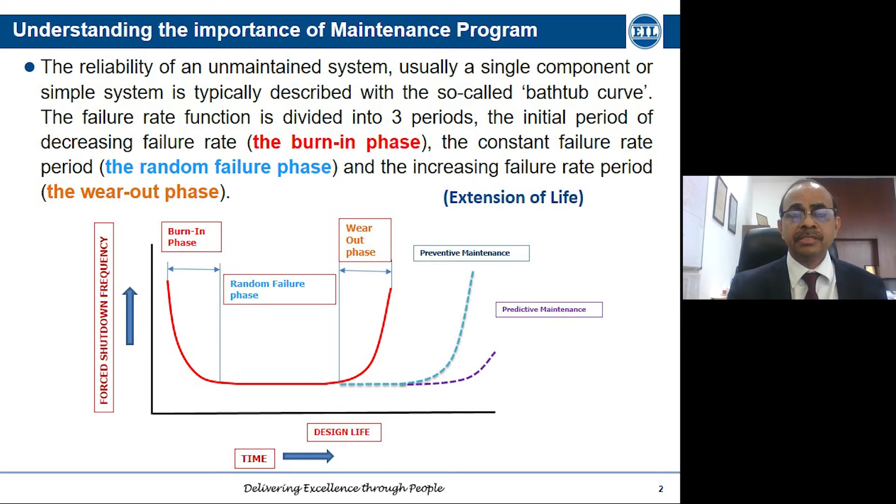And when the equipment is nearing its design life and it is unmaintained, this is the last phase of the equipment operation, again with an increasing failure rate, called the wear out phase. This is typically for an unmaintained equipment. If I do good maintenance, then we can increase the stable life of the equipment by using preventive maintenance.

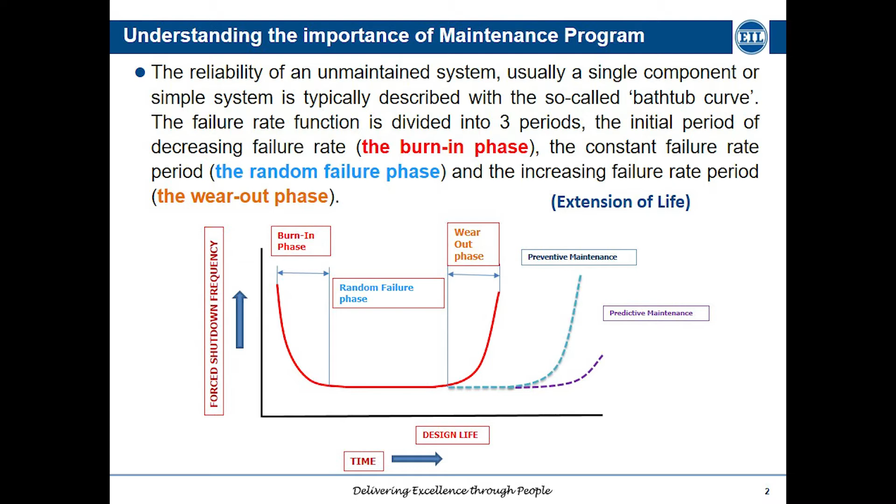I can further increase it. The first one is time-based maintenance. The second is predictive maintenance, where I can increase the life of the equipment further with good maintenance practices. So this shows that we can increase the useful life of the equipment by using the correct maintenance practices.

This is how maintenance is typically categorized. One is reactive maintenance, and the other is proactive maintenance. The first one, reactive maintenance, is when the equipment has failed and it is too late to detect or take an action. The only action is the corrective action they have to take.

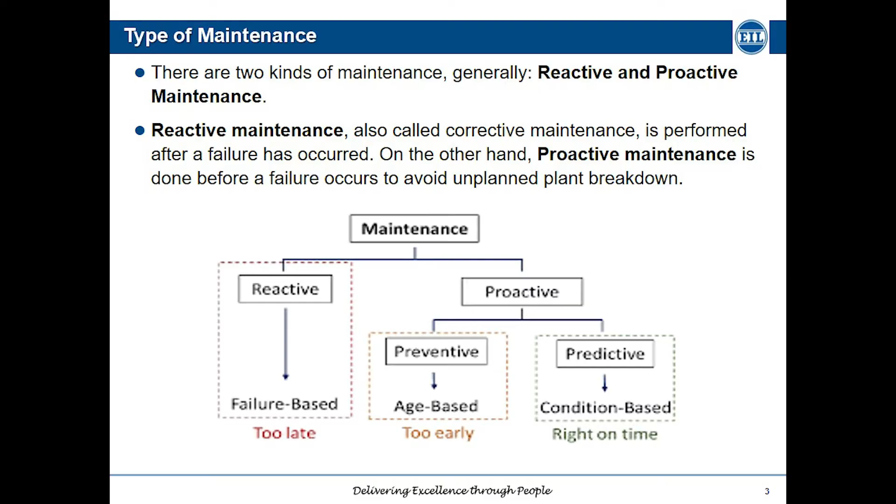The second is proactive maintenance, which includes both preventive maintenance and predictive maintenance. Preventive maintenance means there is already a periodic maintenance program, so before the equipment fails, we have a maintenance program for it, which is periodic in nature. While predictive is based on diagnostics; it is condition based, so when the performance of the equipment deteriorates, the maintenance is carried out before the equipment failure.

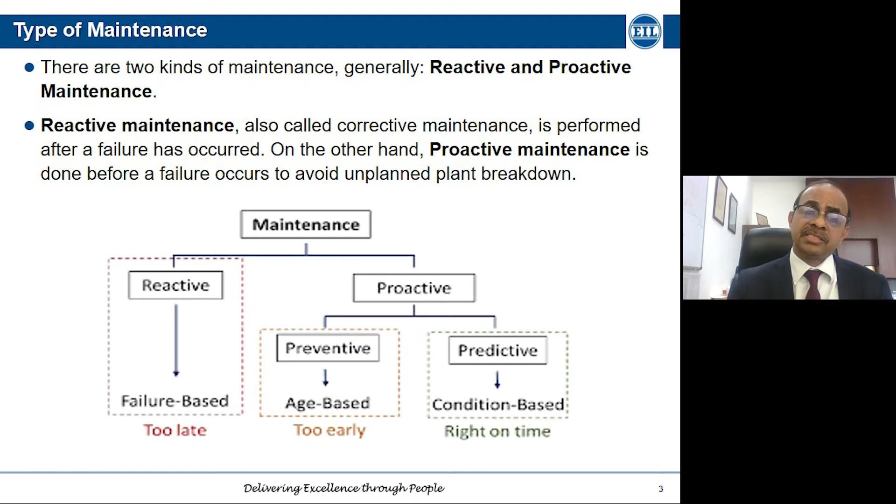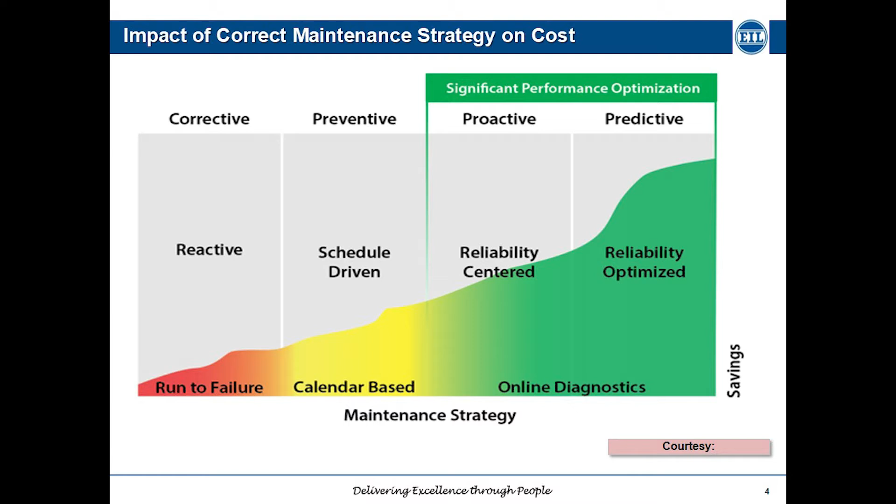This slide shows how the various types of maintenance strategies impact the savings of the businesses. Reactive maintenance gives you very little saving, because only when the equipment fails you take the action, so there is a shutdown period during which you lose production. Next is preventive maintenance, which is calendar-based maintenance. Here I'm spending more on maintenance, so my profits are still not so large.

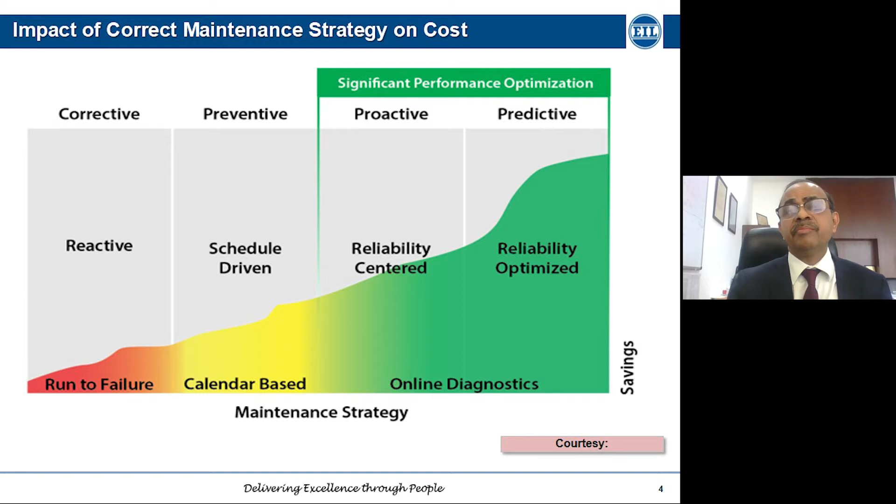And then proactive and predictive maintenance, where there is a substantial increase in the savings, and I'm using online diagnostics to decide when maintenance of the equipment is required, and only then I spend on the maintenance of the equipment.

These are some of the case studies that we have performed recently, because we have a dedicated division for handling asset reliability and health inspections of various equipment.

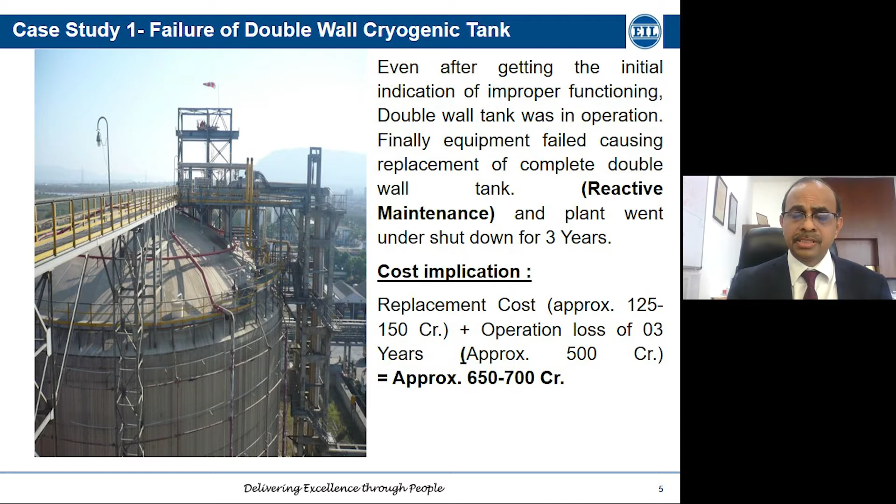This is a case study from one of the owners in the oil and gas sector. These tanks were storing cryogenic liquids, hydrocarbons, and there was a failure noticed by the operators during the operation of the plant. But because there was no maintenance schedule for this, nobody really took action and kept waiting, which resulted in a catastrophic failure of this tank, such that there was no possibility of maintaining that tank, and the tank had to be replaced.

There was a replacement cost of about 150 crores which the owner had to bear. It was a very complicated tank, and it took 3 years to build the tank again. So the total loss we estimate is about 650 to 700 crores that the owner had to accrue because of incorrect maintenance practices.

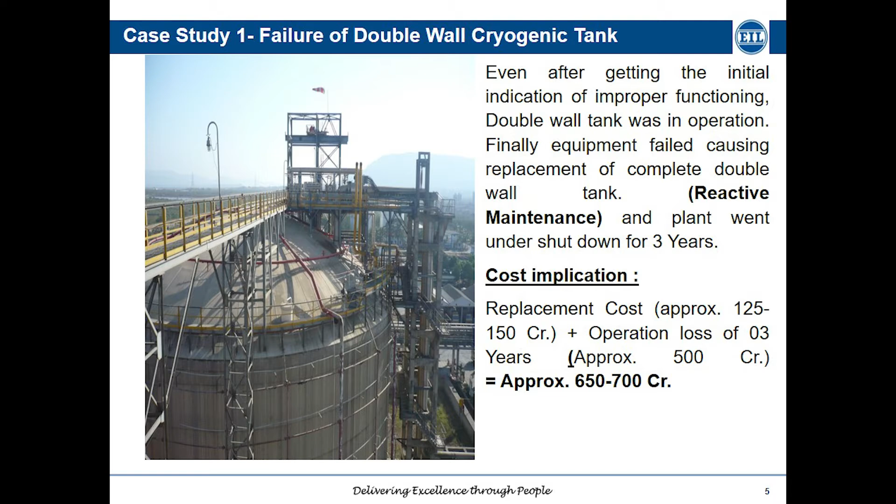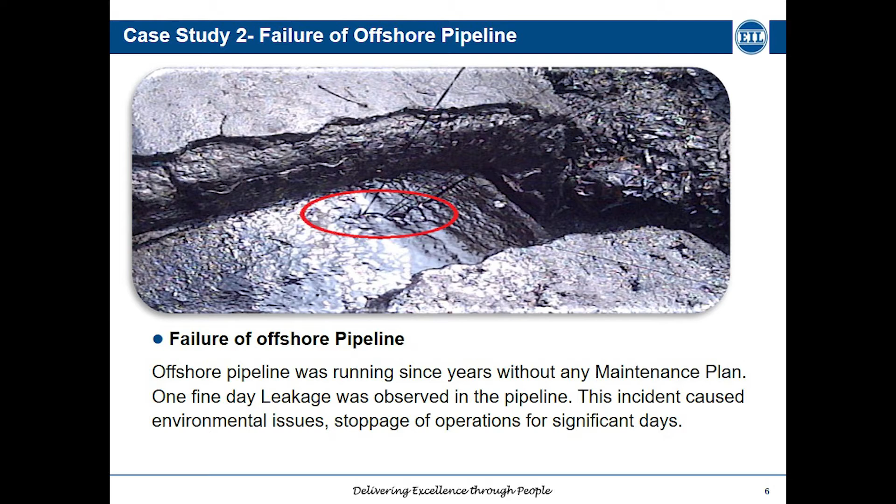This is another case study where a crude pipeline, an offshore pipeline, was running for years without any maintenance plan. One day, a leakage was observed in the pipeline. Since this was handling crude, it went into the sea, causing a lot of environmental issues. Although the stoppage was not very long, only a few days, and the pipeline could be maintained, it had a lot of other impacts on the environment and aquatic systems.

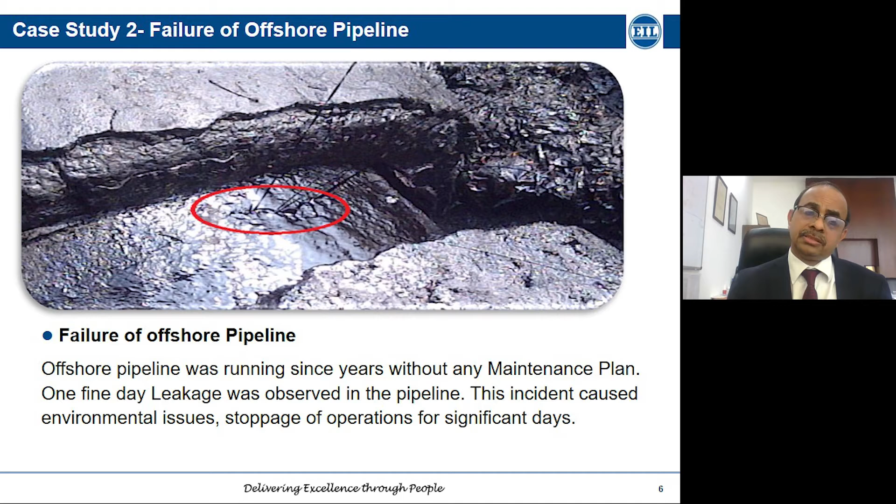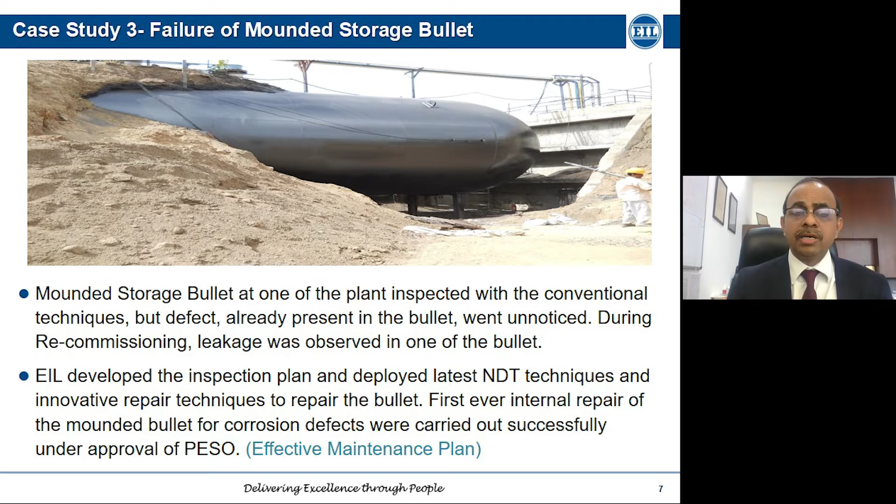This is also one of the recent case studies we have done, involving a mounded bullet at one of our clients. This mounded bullet went through periodical inspection using conventional techniques, and the defect in the bullet could not be traced because of the conventional techniques used. When the bullet was again taken into service, leakage was observed. Since this was very important for the client, who otherwise would have had to shut down the whole plant, they involved EIL, and EIL, using its latest NDT techniques and innovative repair techniques, guided the repair of the bullet.

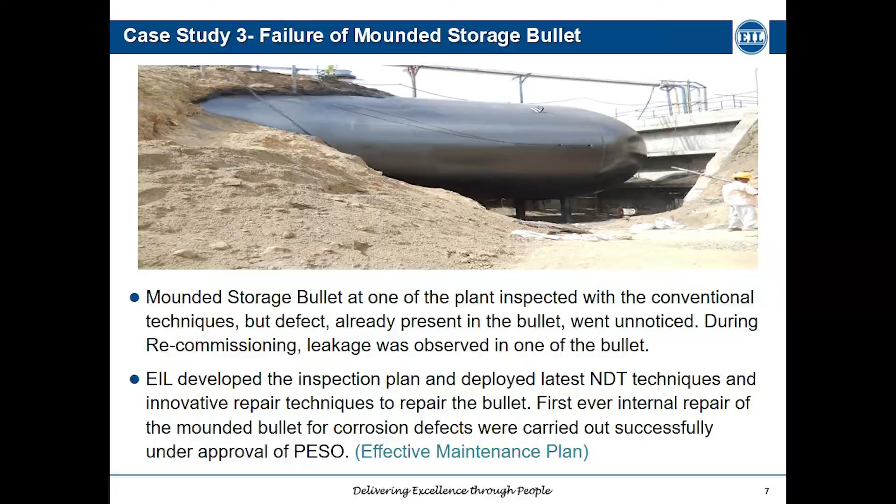This was the first case where an internal repair of a mounded bullet was carried out, and it was successfully done, even with the approval of PESO. This shows the effective maintenance plan that the company should pursue.

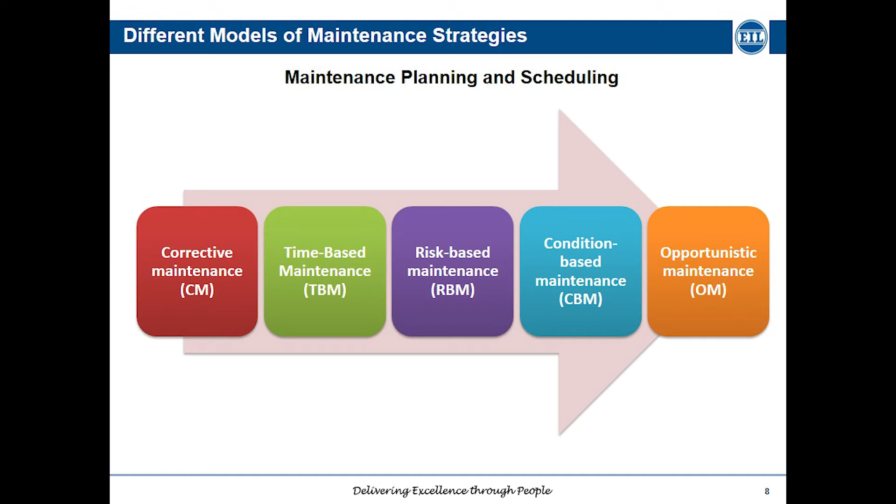This slide shows the various models of strategies that companies can adopt. Normally, what they adopt is a mix of these. Corrective maintenance is typically something which we will try to avoid.

But sometimes if the equipment is not equipped with diagnostics and so on, this is what probably we'll have to follow - corrective maintenance, time-based maintenance. Then we have risk-based maintenance, condition-based maintenance, and opportunistic maintenance.

Opportunistic maintenance comes out of condition-based maintenance - when the diagnostic shows that the equipment is likely to fail, then whenever you get a shutdown of the plant for some other reason, you can utilize that opportunity to maintain this equipment as well. Therefore the total shutdown time required is much less, and it enhances your profitability.

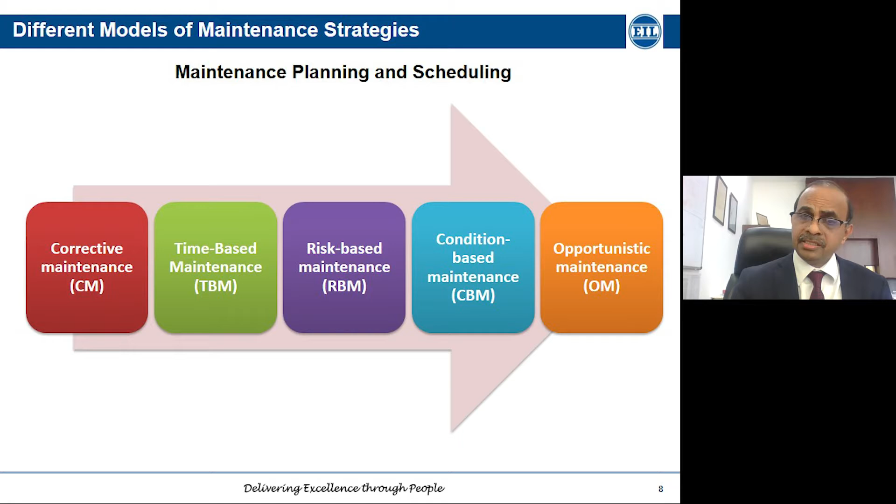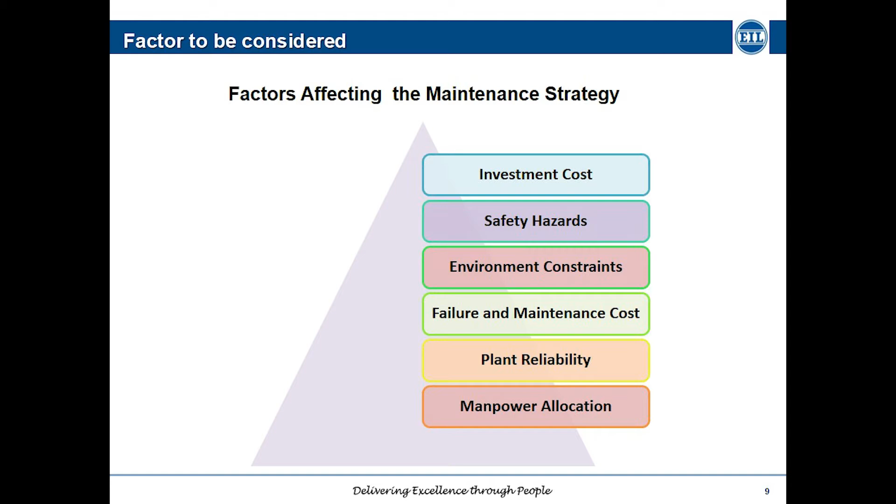So these are the various factors which guide the maintenance strategy that can be adopted by various companies: investment cost, safety hazards, environmental constraints, failure and maintenance costs, plant reliability, and manpower allocation. Depending on these various factors, the company may have to look into charting out their maintenance strategies.

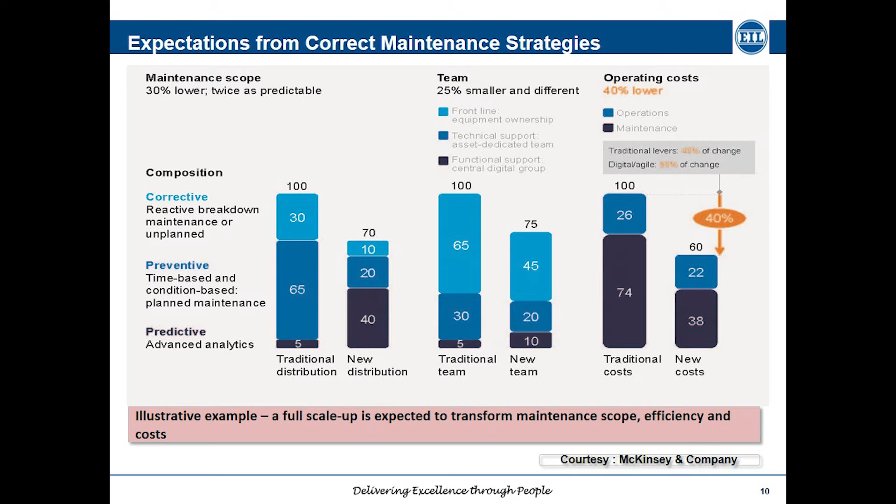The team required for maintenance is also reduced by about 25% when we adopt new practices, because it is helped by digitalization and online diagnostics. And the last point is the cost saving - in terms of operating cost and maintenance cost, the overall cost saving is expected to be 40%.

EIL has been serving the oil and gas industry for the last 50 years. Being a world-class consultancy service in the oil and gas sector, EIL is involved in almost all the upstream as well as downstream segments of the oil and gas sectors. EIL has executed many prestigious and critical projects and supported nation building.

Given the impetus on increasing requirements of asset management, EIL has a dedicated division to provide these services to the industry for asset management to our esteemed clients. Being a design and engineering consultancy, EIL possesses all the know-how of the processes, equipment and maintenance requirements of the oil and gas sector, and provides dedicated services in this field.

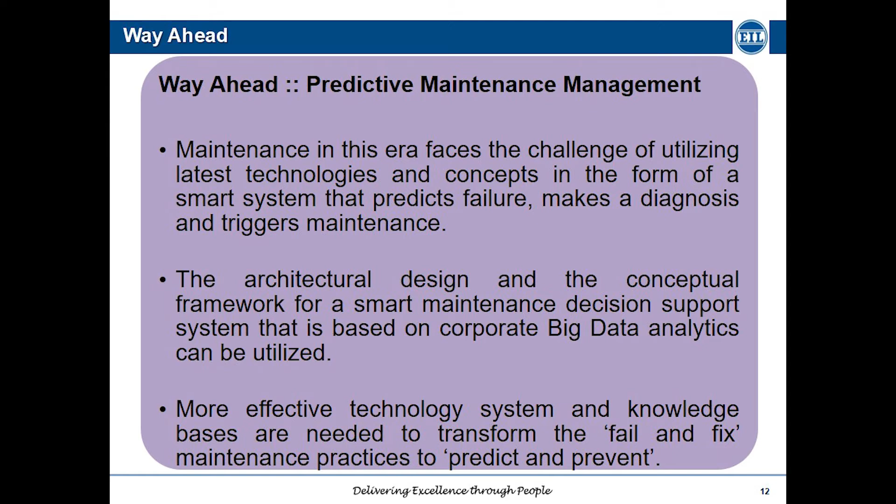So finally, this is the way ahead for the industry: maintenance in this era faces the challenges of utilizing the latest technologies and concepts in the form of smart systems that predict failures, make a diagnosis, and trigger maintenance. The architectural design and conceptual framework for a smart maintenance decision support system based on big data analytics can be utilized for asset management. More effective technology systems and knowledge base are needed to transform the fail-and-fix strategy currently prevailing in the industry to a predict-and-prevent strategy, to make our business operations more profitable and more sustainable.

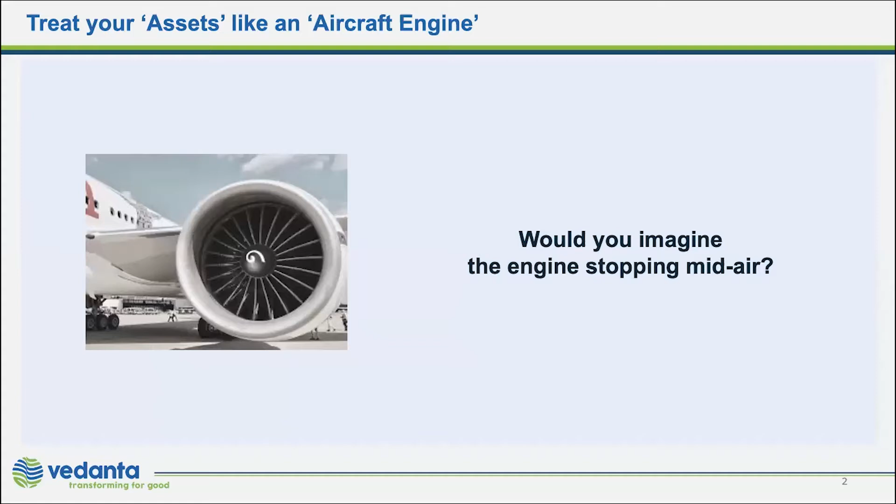So tell me, will any one of us like to sit in an aircraft and suddenly it stops midway? None of us will like to do that. And the reason is because we don't want to die. So if we treat all our assets, regardless of whatever assets we are in—power plant, manufacturing of aluminum, zinc, or anything else—if we treat them like an aircraft engine, it will not stop midway.

Now let me explain the analogy of this aircraft engine maintenance secret. The way they do it, they follow a very stringent process. Before even the aircraft comes, they are aware of what needs to be done. When the aircraft is on the ground for maintenance, there are multiple people and multiple staff working on it, and they track each and every one of them. And post facto, they do analysis. It's a continuous process, and it keeps getting improved. So if we start treating our assets the same way we treat an aircraft engine, they will behave the same way.

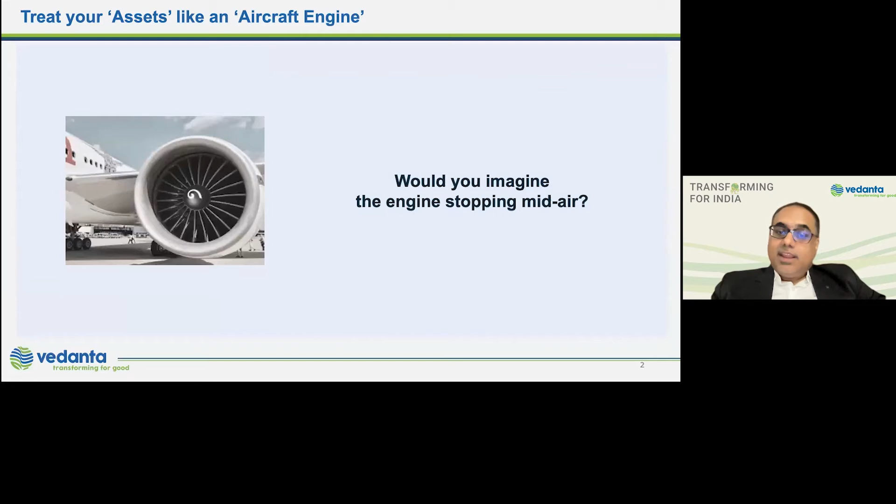There are four different criteria for success for a great turnaround. One is it should be a zero-fatality thing—it should be completely safe. Whatever we do, if we are able to understand the entire process and figure out any issues which can be created, and handle it much ahead, making sure the right PPEs are there, right trained people are there—this is one of the most important success criteria for a great turnaround.

Then is schedule overrun. Any delay is a cost to the company. When I say cost to the company—let's assume a capital overhauling is planned for 45 days, and it took another 5 days because of the process. You lost opportunity for production for 5 days, so it's going to impact the company's overall revenue.

Then is cost overrun. Sometimes either you ask for more parts which are not needed and which will just be sitting in inventory, or you don't plan it right and you don't have the right parts, so you buy more expensive ones during the turnaround. This can be a problem.

Finally, one of the most important aspects is the great quality of the work—that we know who is going to do what, how exactly it is done, and post facto, understanding the entire factor, making sure the assets will run the way they should. Success boils down to these important factors: how is the planning done, how is the execution done, and post-execution, how is the analysis done on the data.

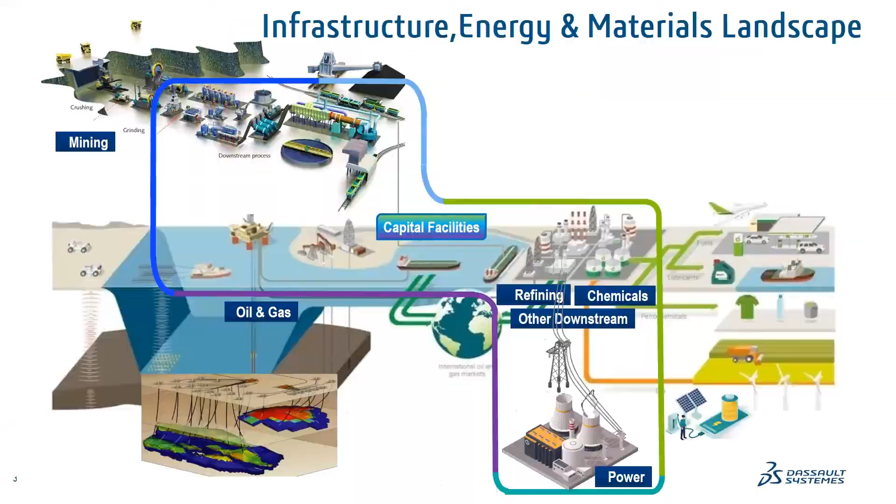With these 11 industries, infrastructure, energy, and materials is one area where we provide solutions to our customers. This energy industry spans mining, oil and gas, refinery, chemicals, process industries, and power as well.

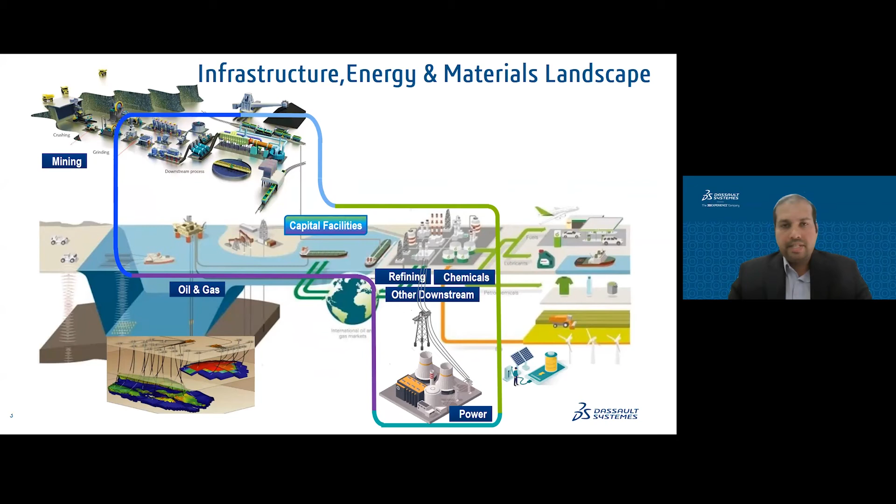We have solutions for each different stage, from project capital facility standpoints to operations and vertical solutions as well. So today we are going to see one of those solutions we offer.

Coming from the same industry, some of the key challenges of turnaround management are obviously extensive coordination between multiple stakeholders, and contractor productivity is low because of various reasons like skill shortages and so forth.

We have unaccounted maintenance requirements, where you come on a particular day and see that this has not been accounted for, and obviously safety and compliance reasons. That translates to loss of production.

And that is what we want to address here: how can we minimize the loss of production?

Now, very quickly, we know the turnaround cycle is a 4 to 5 year operation cycle, and then 1 to 2 months of implementation, maintenance, or shutdown, what we call the outages and maintenance cycle.

What we would like to help the industry with is extending that cycle from 4 years to 4.5 or 5 years.

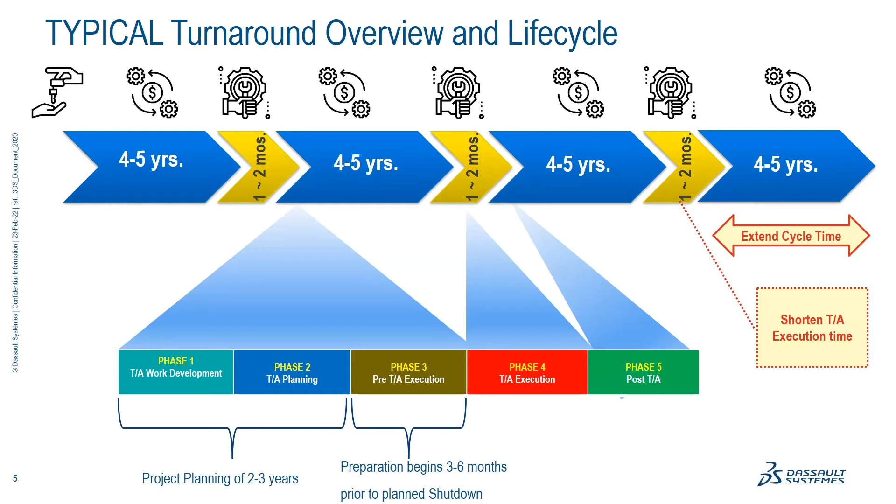And also to shorten the duration, making sure your turnaround is as planned, maybe 4 weeks, 6 weeks, whatever it is. We don't want it extended further. We term this STO: shutdown, turnaround, and outages excellence.

The key KPIs for this business are obviously safety, and you look at quality. When I say safety, you need zero injuries and so forth.

Quality means you have so much information, so many systems - ERP systems, cost management systems, contracting systems, and so forth - and we want quality documentation as well as quality work on site.

The schedule should be on track, on time. That's the key to make sure we start and finish on time.

Cost is obviously one of the major factors. We want to make it on budget.

And as the previous speaker mentioned, knowledge - how do we capture our knowledge for the next generation, or for the young engineers and so forth. We call this STO excellence, and we can achieve that using a 3D Experience Platform, what Dassault Systèmes offers.

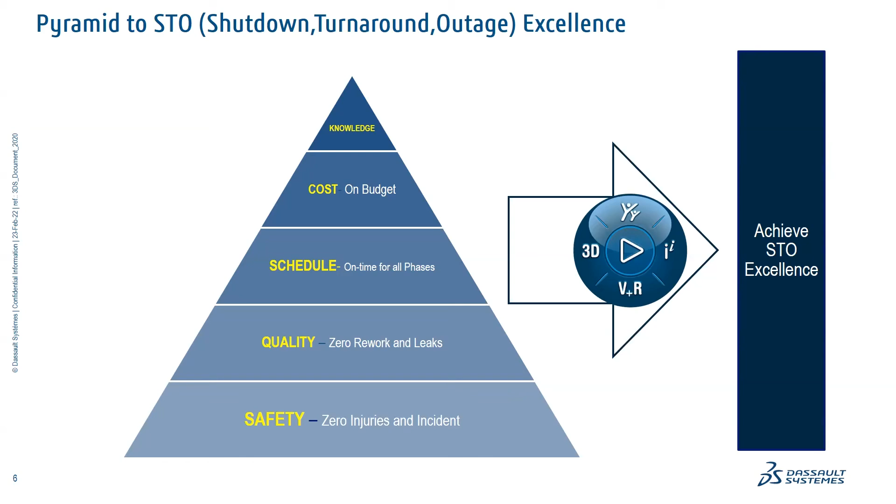Now, what is the 3D Experience Platform? This is a massive platform that helps you with many different solutions, tools, and collaboration tools and so forth.

We basically started with product lifecycle management, so you can manage the plant lifecycle of the assets from inception to decommissioning. We can manage the full lifecycle of your assets, all the different types of data.

In this particular world, how do you try to understand and derive what information you need? How can you move your facility from a reactive approach to a predictive and proactive approach by analyzing all your data?

And obviously with virtual training, realistic simulation, and virtual maintenance, your employees can actually learn about unknown conditions. How can you teach them, train them, or help them work in hazardous conditions? With all the different applications today, we can interface.

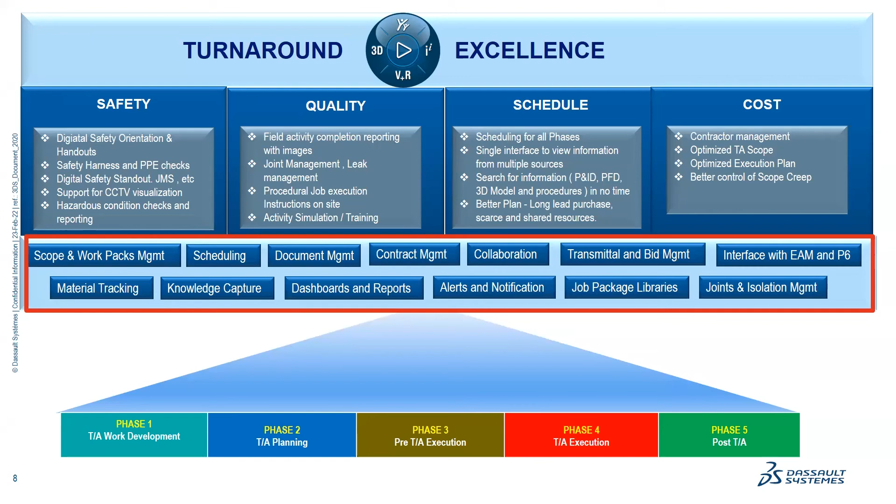You could manage your contractors and all the dealings with your contracts, collaboration within your very internal collaboration, as well as your collaboration with various different stakeholders. How do you basically transmit information between contractors, subcontractors, and so forth? Transmittal and bid management is the answer for that. We could interface with your existing EAM solutions or even project management solutions.

You could do material tracking with your material tracking solutions, knowledge capture, which is basically trying to capture all the various information and so forth for the next turnaround and improve on the next turnaround. Dashboarding and reporting capabilities, alerts and notification, obviously helping people to act on time so that all the tasks are not overlooked.

And obviously we have a list of all the libraries. That means, for example, job package library is a list of all the activities that need to be conducted on a specific piece of equipment. Let's say columns, you already have predefined activities that need to be managed in a particular column, and that can also be customized and added to your needs. And obviously joints and isolation management, which I'll be showing as a sample demo in a few minutes.

Now, just to give you a high level overview, right? All of these different components of the solutions come together to actually help you and give you a full-fledged solution to manage your shutdown or outages and help your crew members to act in a proper manner, in a timely manner, and so forth. Let's move on straight away into some examples rather than showcasing many of the slides here.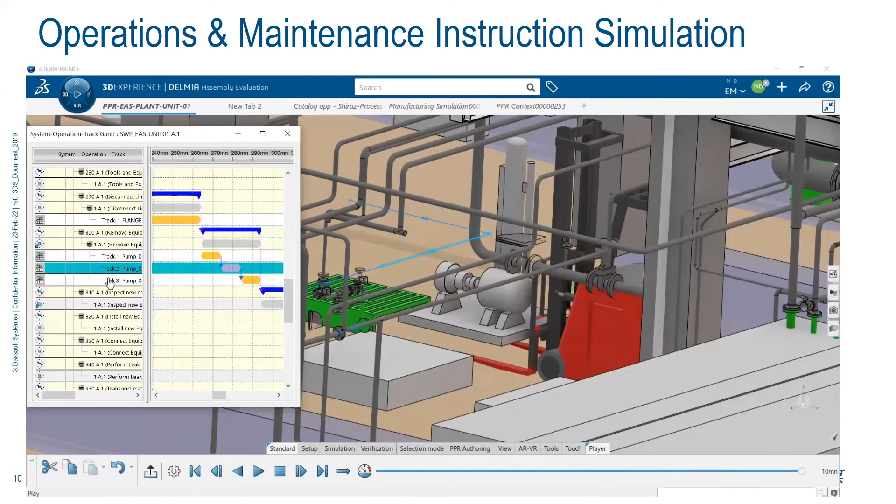Now, I want to show you one of the examples. On the left-hand side, what you're seeing is a plan, and on the right-hand side, you're seeing a 3D model. When you select any of those assets, it can basically simulate and show you exactly how things need to be done on site. This is a good thing for your training. And also, it is good for your planning.

For instance, if you wanted to bring a huge 500-ton crane into a limited confined space, how do you plan? You can use your simulation and planning tools to actually simulate and train well ahead of doing it on site. So that's one of the examples.

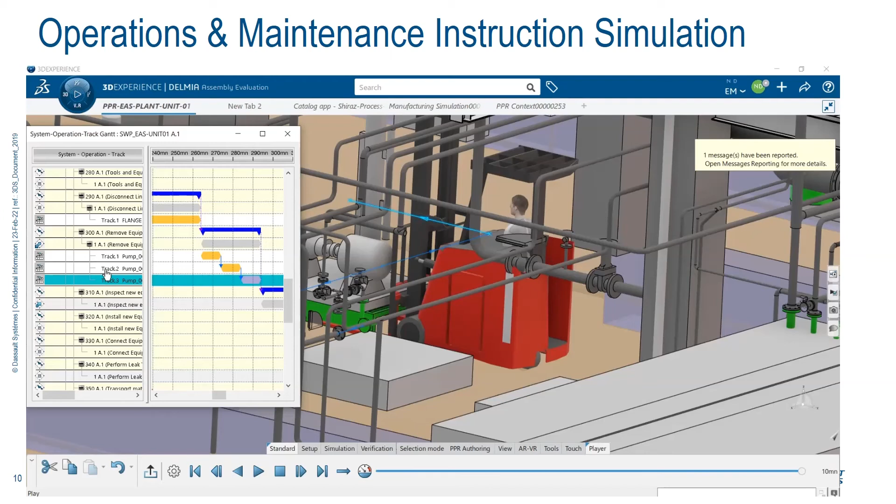And the second example I wanted to also touch base on is a real scenario on the site. Most of you may know we have isolation barriers. Basically, whenever you want to clean up a particular column or vessel, or do any of those maintenance activities, you first need to isolate all of those connecting pipes and the inlets and the outlets so that everything is clear from hazardous materials. And then you basically do the maintenance activities such as flushing and so forth.

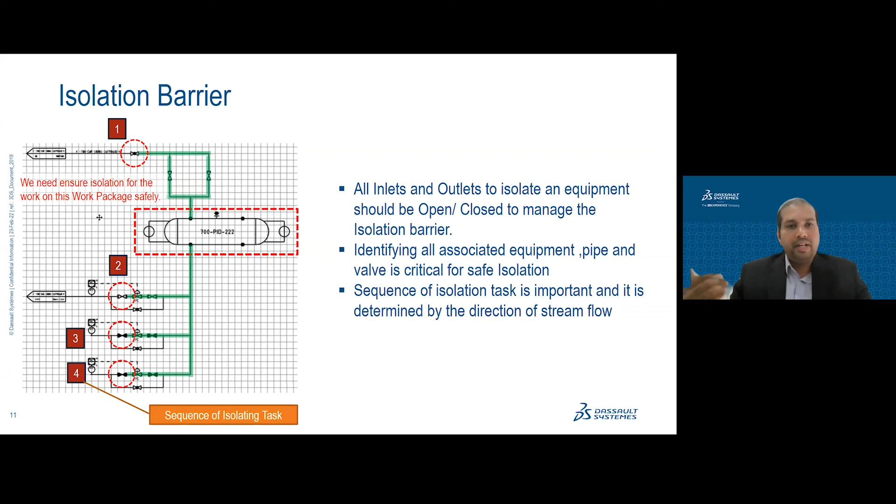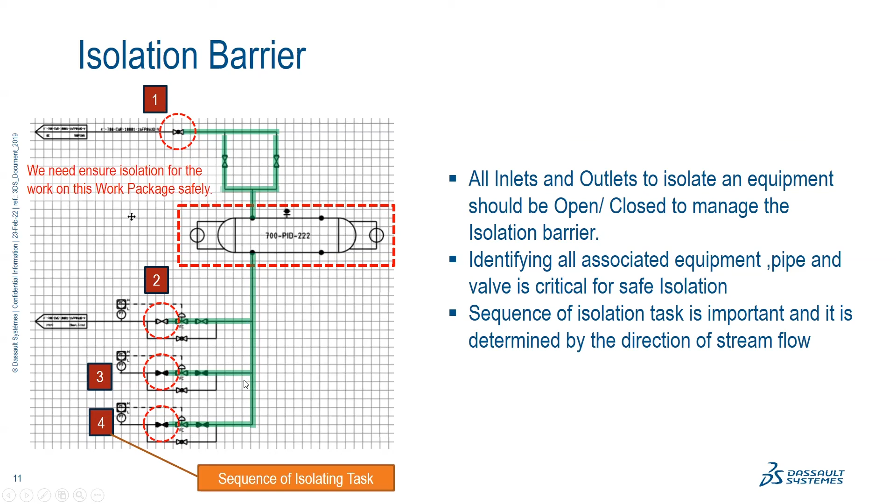Here, what you're seeing is a P&ID. Now, in this particular P&ID, you have got this particular vessel here, and you've got all the different lines, pipelines, and you've got 1, 2, 3, 4 valves. Obviously, this is your isolation barrier or isolation loop or isolation circuit, you could imagine. Now, if you have a 3D model, it looks like this, mapping each and every valve to your 3D model.

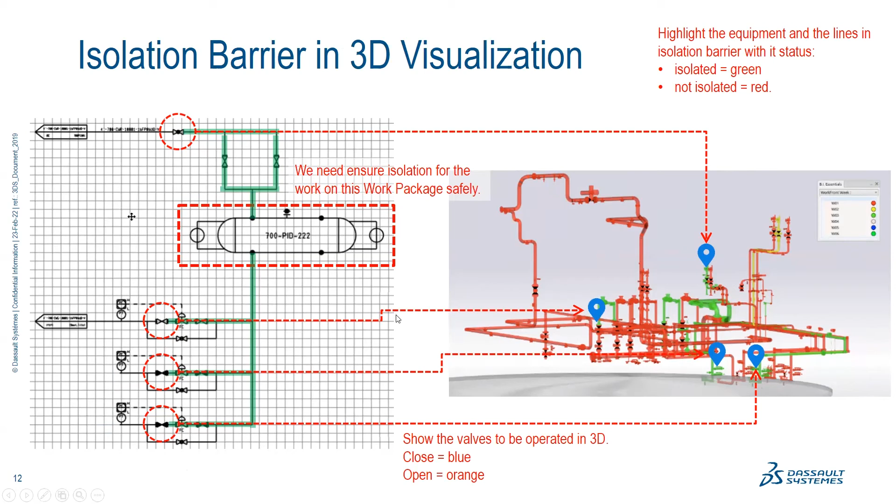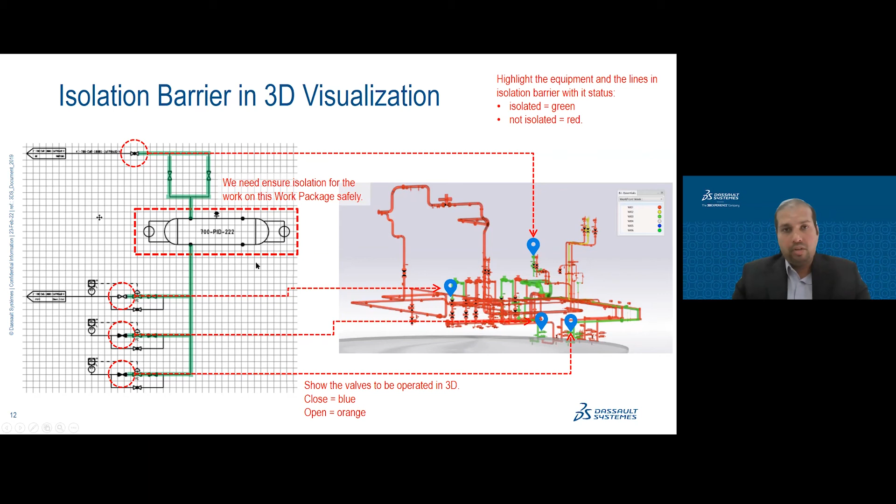And obviously, to conduct any particular activity on site, you basically need to action, which means you need to close this valve, close this valve, close the third valve and fourth valve, and then you're good to go with your maintenance activity for your shutdown or outages, right? So I'm going to show this particular example in our solution so that you have a good understanding of how our system works.

Now, I need to add the valves which need to be actioned, right? For example, which need to be closed or opened and so forth. So I'm going to add the valves now for this isolation loop. Again, as I said, we are retrieving the valve information and all of those different information from your source drawing, whatever source you have got, such as P&ID or your 3D CAD models.